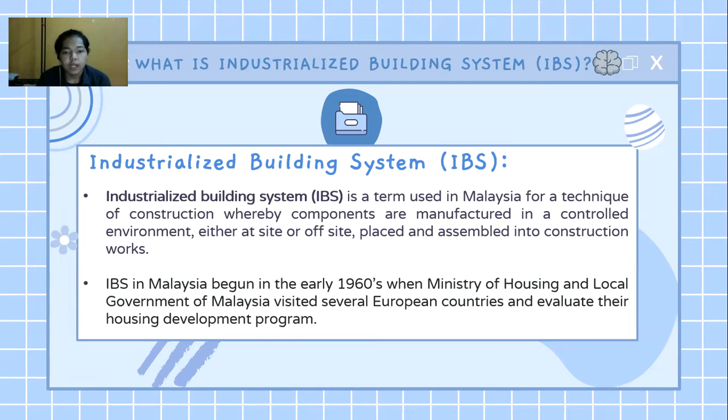The next point is statement of the problem. For your information, normal construction workers use concrete instead of IBS, which can result in some errors while doing the job, such as workers adding an improper amount of water to the concrete mix, inadequate consolidation, and improper curing, which can cause distress and deterioration of concrete. There is a specific word for the deterioration of concrete, which is disintegration. Disintegration can break concrete into small fragments and individual aggregates.

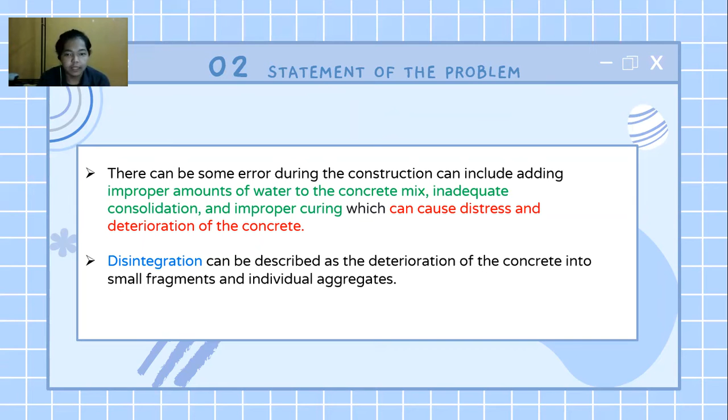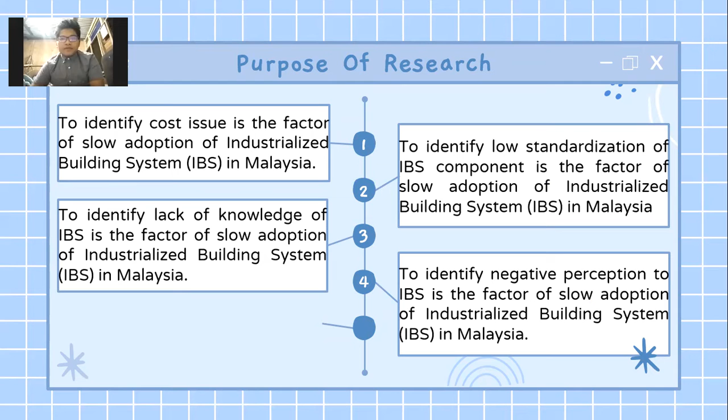The third is to identify whether lack of knowledge of IBS is a factor of slow adoption of IBS in Malaysia. And the last is to identify whether negative perception of IBS is a factor of slow adoption of IBS in Malaysia.

Now for method of research. First is literature review. The literature review was conducted to determine an overall idea of industrialized building system. The data and information will be collected from books, journals, dissertations, and information from the internet. This material will be used as a background study to understand the topic. By having all the information, it will show the critical path and lead to the research purpose.

For the second method, questionnaire survey method, this is used for data collection for IBS, and the questionnaire will be distributed to construction players such as developers, consultants, and contractors. The respondents will be asked about their knowledge of IBS, their preference for promotion and marketing of IBS in Malaysia in the future, and why they are choosing or not choosing to use IBS.

The last method is interview, conducted to understand the market need and to understand more about IBS. The targets of the interview will be CIDB officers, developers, consultants, and also contractors.

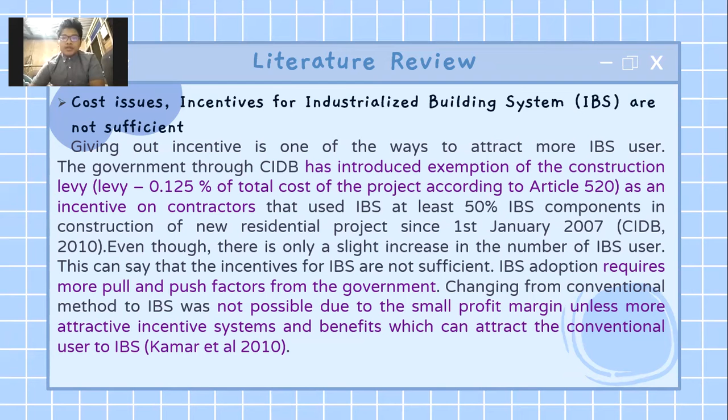Even though there is only a slight increase in the number of IBS users, this shows that incentives for IBS are not sufficient. IBS adoption requires more pull and push factors from the government itself. Changing from conventional methods to IBS is not possible due to small profit margins, unless there is a more attractive incentive system and benefits to attract conventional users to IBS.

Okay, next is high initial investment capital.

Many small contractors are reluctant to adopt the IBS system and prefer to continue using conventional construction methods. This is because small contractors lack financial backup and are unable to set up their own manufacturing plants, as it requires huge investment capital. In this case, financial issues become the main obstacle for small contractors to move forward with IBS.

From the perspective of component manufacturers, IBS construction requires high initial investment capital to purchase new machinery, molds, importing foreign technology, and wages for skilled operators for the installation process.

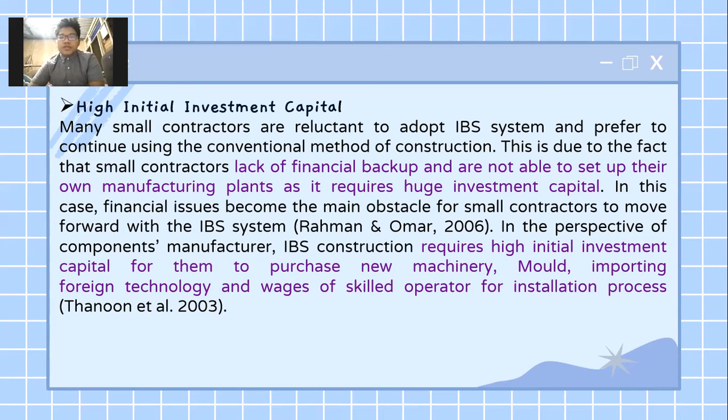Alright, next is advantage and disadvantage of Industrialized Building System. As you can see, the red sentence is the advantage, and the blue one you'll see next is the disadvantage of IBS. First, by using IBS, manufacturers can provide quality controlled end products through the controlled prefabrication process.

IBS requires simple on-site installation. Besides, it can provide faster completion of construction. This is because IBS uses standardized prefabricated components.

Another advantage of IBS is it creates a neater, cleaner, and safer construction site. There will be a reduction in construction debris, site workers, and materials involved on the construction site when using prefabricated components.

For a long term period, IBS will be a cost-saving construction method, saving a lot of money for the company. The formwork made of steel and aluminium allows for repetitive use, leading to considerable cost savings. Besides, IBS also has flexibility of design.

It can provide additional aesthetic value to the project design, and at the same time provide higher quality and better finish.

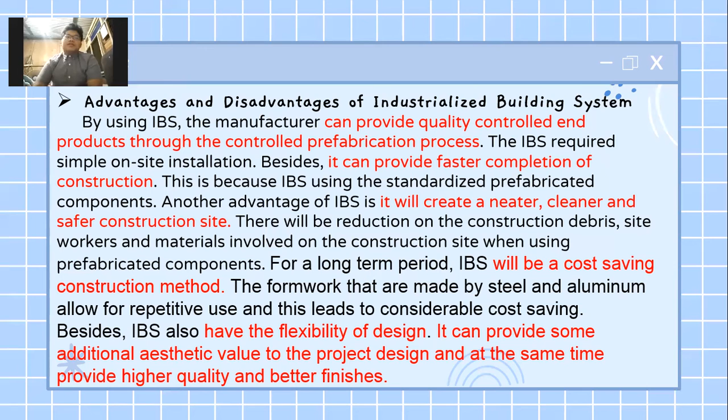Okay, next, IBS also has its disadvantages. This is the blue sentence, the disadvantage, like I said earlier. The initial cost of IBS is usually high, for supporting machinery and factory setup.

The prefabrication system relies greatly on sophisticated machineries, which have to be well controlled and maintained by skilled operators. Problem of joints is one of the major problems in building construction using IBS, which leads to water leakage.

Producing IBS components requires a large working area for setting up factory machinery and storage to store the components. IBS may also cause delays due to supply delays and shortage of raw materials. Delay may also happen due to lack of expertise.

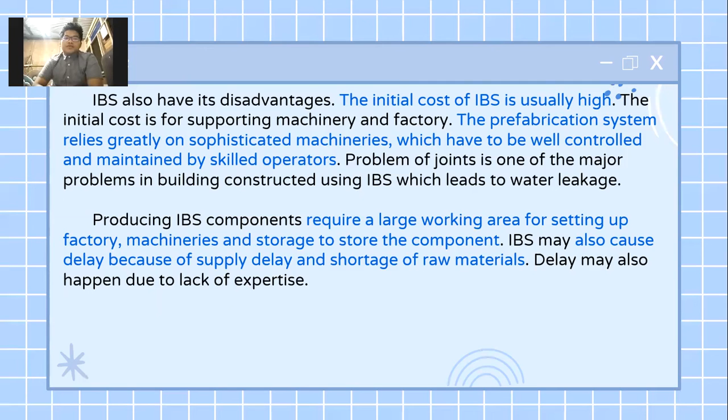And next I will hand over to Akmal. Okay, I would like to talk about the conclusion.

A newly discovered obstacle is the traditional thinking of buyers who prefer homes built of bricks and mortar. There were other perceptions and misconceptions about precast panels, where buyers state that it is an element of housing construction with lower quality, as it is done periodically for the construction of low-cost housing projects in Malaysia.

Therefore, the parties involved in the construction industry must take the initiative in producing alternative construction methods to compete and remain relevant in the construction industry.

Lack of experience and technical knowledge of contractors regarding IBS causes costs to be higher due to failure to manage costs. Lack of appropriate technology and management, related experience, quality, productivity, and even safety issues make local contractors unable to compete with their counterparts in other countries who generally use and implement IBS.

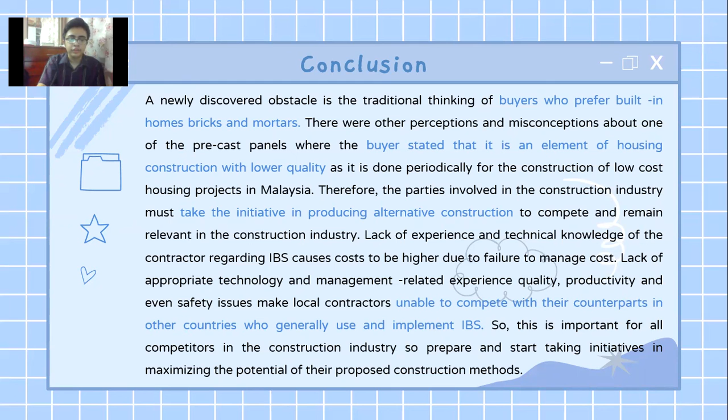So this is important for all competitors in the construction industry, to prepare and start taking initiative in maximizing the potential of their proposed construction methods.